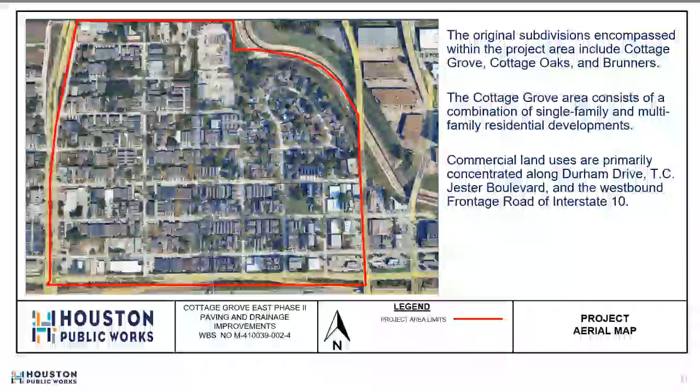This neighborhood is made up of commercial properties along the boundary and one isolated commercial project area in the north. Predominantly townhouses and single-family residences within this site. Slide, please.

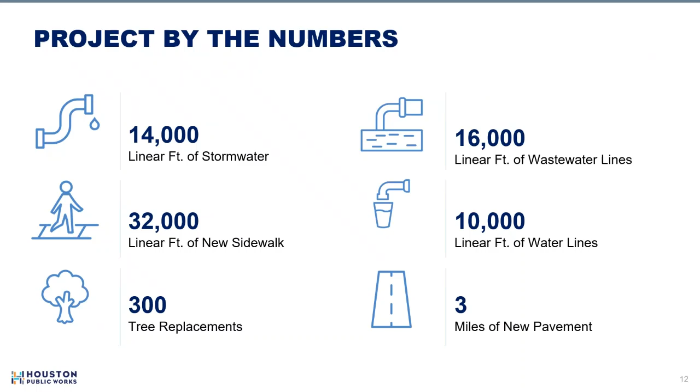Total linear foot of storm sewer installed will be 14,000 linear feet. We have 32,000 feet of new sidewalk, 300 tree replacements, 16,000 feet of new wastewater line, 10,000 feet of water lines, and 3 miles of new roadway. Each intersection will have new ADA accessible ramps. There'll be a small connectivity to the White Oak Trail with a hike and bike connection, all new drains, and 20 new streetlights.

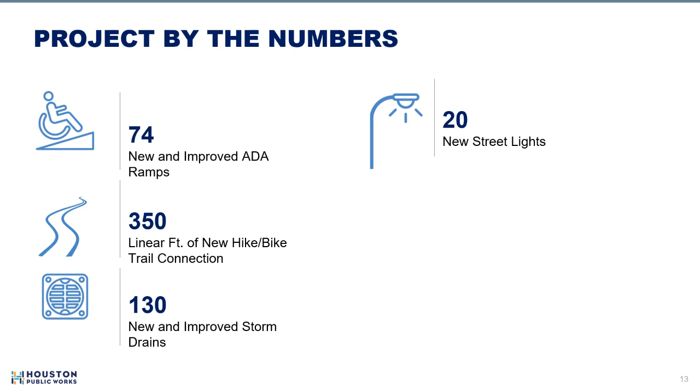The proposed pavement section is a curb and gutter with new sidewalks, on a 26-foot wide street, to replace the existing streets that are curb and gutter.

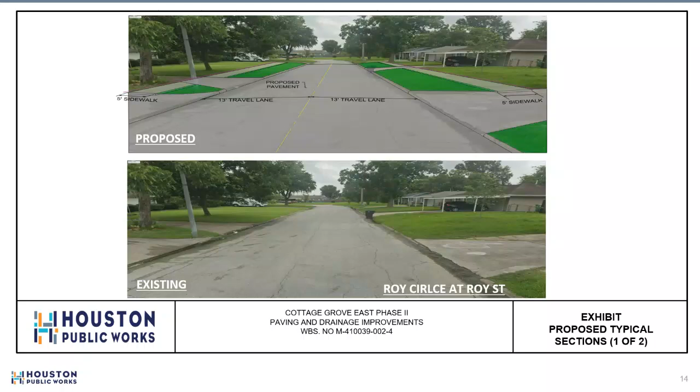The open ditch streets will be converted to curb and gutter with sidewalks as well.

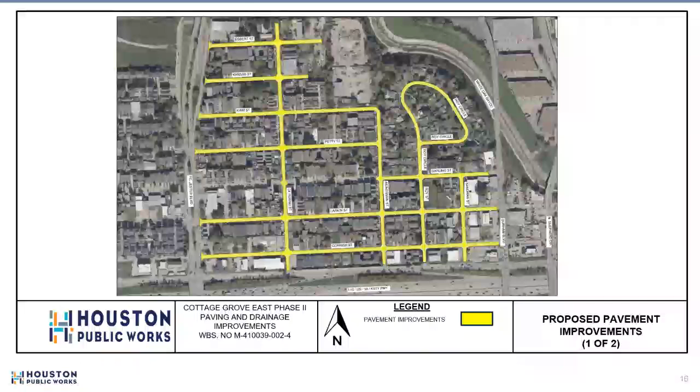The proposed pavement improvements are shown in yellow on the current slide. There's one section of Darling Street that was recently reconstructed and will not be impacted by construction, with the exception of the intersection of Detering and Darling.

These are typical sections of what exists and what is being proposed in your neighborhood. Increased roadway pavement width to meet the city's minimum standard of 26 feet. We're going to convert your open ditch roadway sections to curb and gutter sections with underground storm sewer infrastructure.

There will also be a minimum 5-foot sidewalks on both sides of the roadway. Where feasible, there may be some segments that are 4 feet. Relocation of utility poles that conflict with the proposed roadway and sidewalk improvements.

The proposed paving will be 6 and 7-inch thick concrete depending on the area and the commercial traffic there. The pavement will be stabilized over an 8-inch stabilized subgrade.

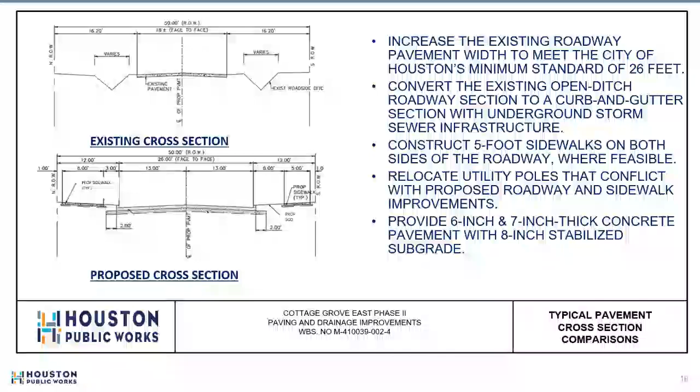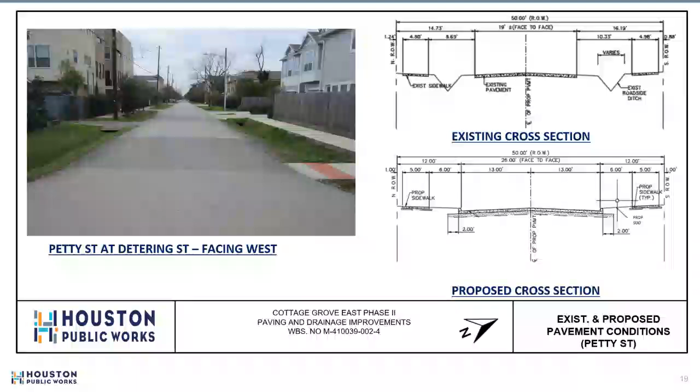This is a typical section of an open ditch street, which will be converted to a curb and gutter, as you see from the typical sections on the right-hand side of the slide.

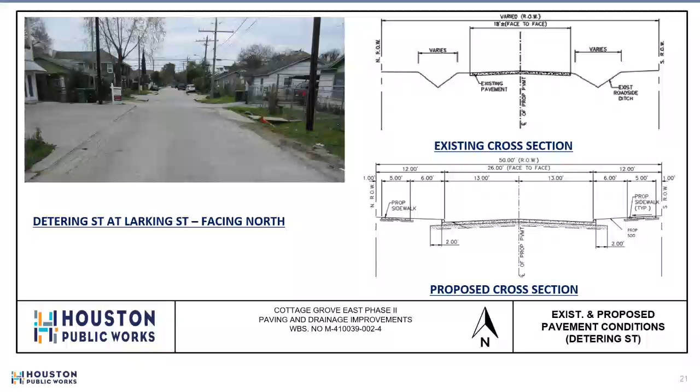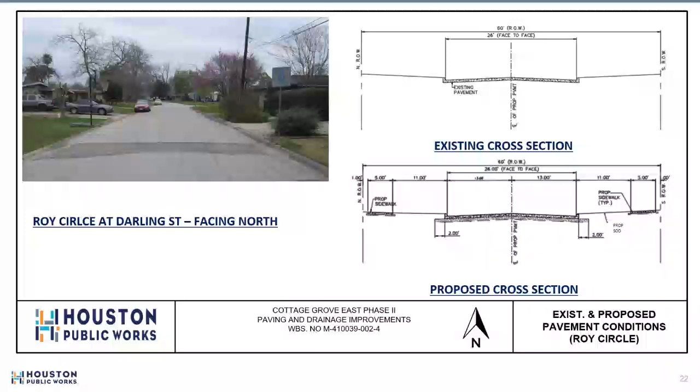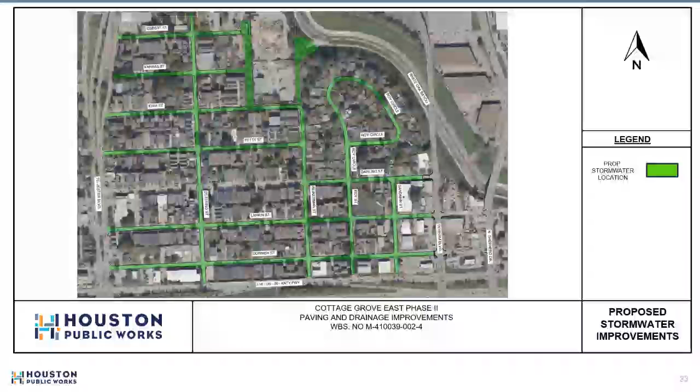The proposed stormwater improvements are shown in green and encompass the entire area where we are replacing pavement, as well as a drainage easement along the corner of Reinerman and Kiam, which feeds the discharge point to White Oak Bayou.

Our proposed water lines encompass the majority of the project, as shown in purple.

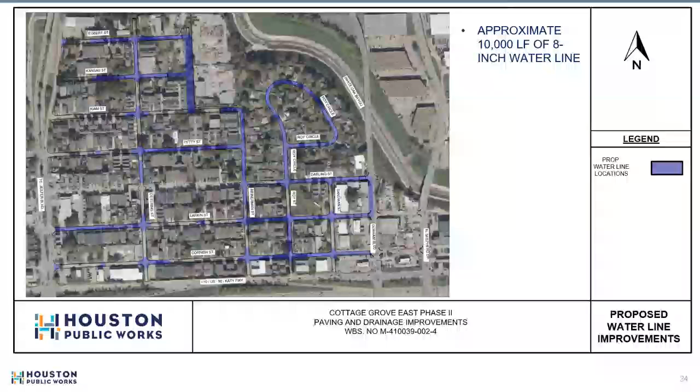For wastewater, everywhere we're putting in new pavement, we're getting new wastewater lines as well and service connections.

Okay. Alright. Thank you, Robert. Thank you.

So, next steps. We are at the home stretch and we are now preparing for the construction process. Don't worry, we'll come back to host a how-to-prepare-for-construction meeting with you before work begins, so stay tuned.

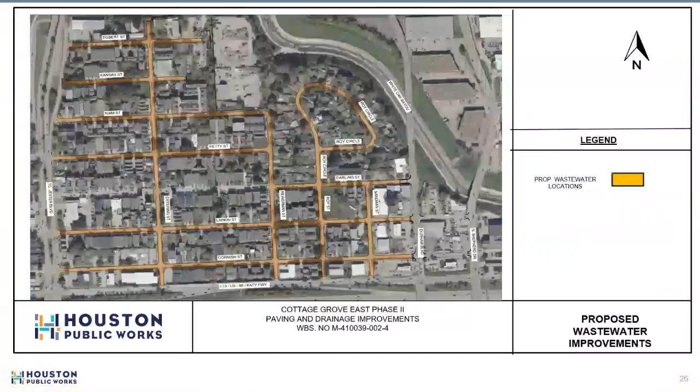What is the project number for reference? Let me move to the slide with the project number. There are numbers here too, but let me go to the main slide. The project number is right here at the bottom. So you have M-410039-002-4. All right, thank you.

Are there any plans to put in speed bumps or anything that controls speed limits in the neighborhood? I think there are no speed bumps on these streets currently, but if it's required, we will provide them. Thank you.